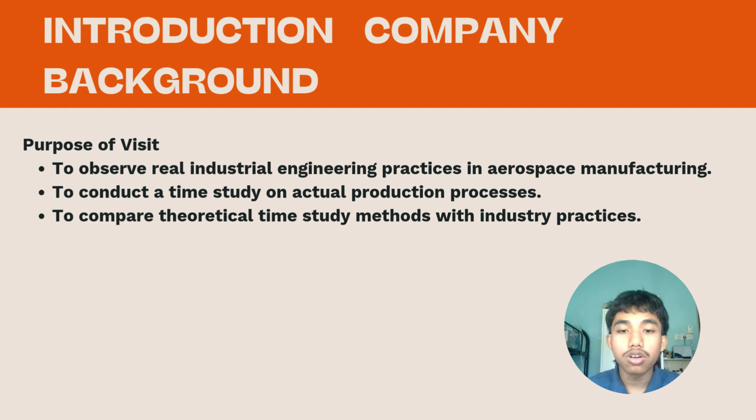Company background of the Spirit AeroSystems. So, what does Spirit AeroSystems do? Spirit AeroSystems is a global aerospace manufacturer of aerostructures. They produce fuselage sections, wing components, and structural aircraft parts for the major aircraft manufacturers in the world, such as Boeing and Airbus. But not just that, they also support commercial and defense aviation programs. Everything they do is about high precision manufacturing to make sure every part is perfect.

Problem statement. In our study, we identified a key challenge in time study methodology. The formula we learned in class is different from the one applied in industry. The theoretical formula calculates standard time by dividing normal time by 1 minus the allowance. Meanwhile, the industrial formula multiplies normal time by 1 plus the allowance.

This difference may seem small, but it has a big impact. It changes how productivity is measured, how resources are planned, and how realistic work standards are set. So, the problem we are addressing is the gap between classroom theory and actual industry practice, and understanding why this difference exists.

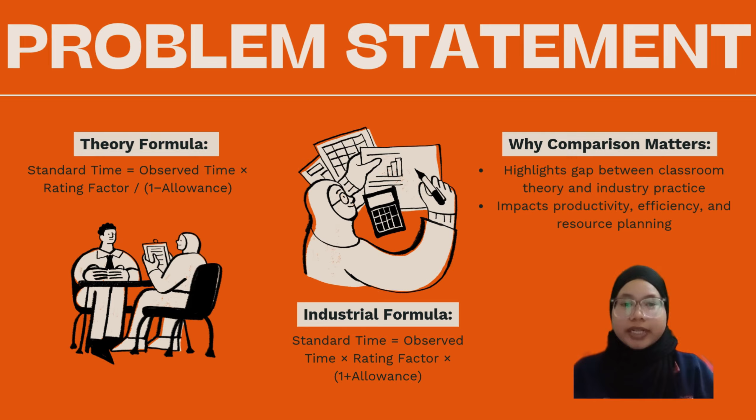To tackle this problem, our project has several objectives. First, we wanted to understand industry practice in time study by observing real aerospace manufacturing tasks. Second, we aim to collect and analyze real-time data, recording observed time over 5 cycles using stopwatch measurement. Third, we compare the theoretical and industrial formula to see how each affects standard time calculation. And finally, we apply industrial engineering tools to propose improvements in efficiency and ergonomics.

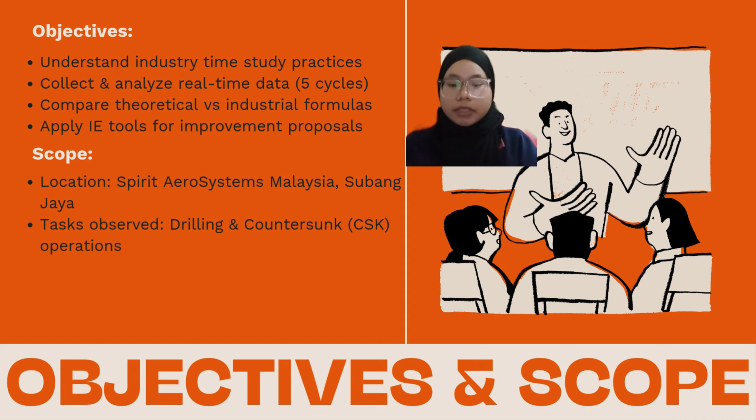In terms of scope, our study was based on an industrial visit to Spirit AeroSystems Malaysia, focusing specifically on two tasks, the drilling process and the countersunk process. So, I will continue for the next two parts, which are methodology and process flow. So, for the introduction of methodology, the visit was carried out at Spirit AeroSystems Malaysia, and we were assigned to the radome manufacturing area. This is to perform a time study and analysis for the manufacturing process.

So, our team has been assigned to collect data for two different tasks, which are the drilling task and the countersunk CSK task. So how do we carry out the time study and analysis? First of all, we observe the procedure step by step for each task. Next, the data are recorded over 5 cycles to calculate and observe any differences. We use the observation sheet from Spirit and the stopwatch to record the time study. The observation sheet was prepared by Spirit. Then we continue to record the time for each task in minutes and seconds for each activity.

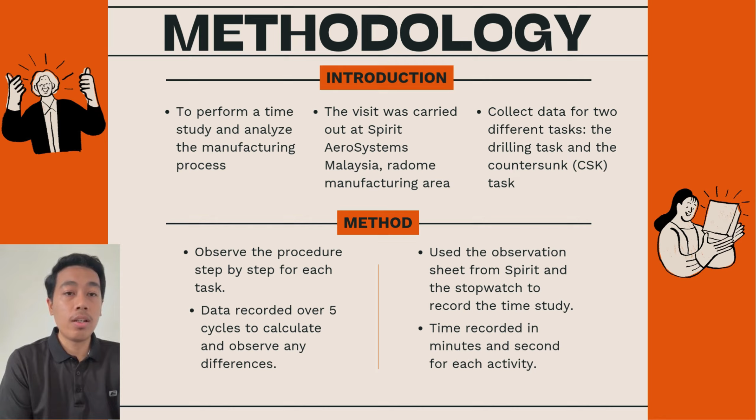The next part is process flow. So for the drilling task, there are many procedures to follow to complete the task, which is firstly connecting the air hose to the compressor. Next, attaching the air hose to the drill gun. After that, the worker needs to install the drill bit, stopper and the drill guide. After that, he will perform the drilling operation on the test piece.

After that, he needs to change the drill bit to the deburring set. Then performing the deburring process. Lastly, inspecting the hole using a go or no-go gauge. That's for the drilling task.

So for the countersunk task, CSK task, the procedure is much less, but it is still time-consuming because there are some adjustments or settings that need to be performed. First of all, attaching the air hose to the drill gun, same as the drilling task. Next, installing the countersunk tool. Then performing the required setting and adjustment. After that, carry out the countersinking operation. Lastly, conducting the fastener test.

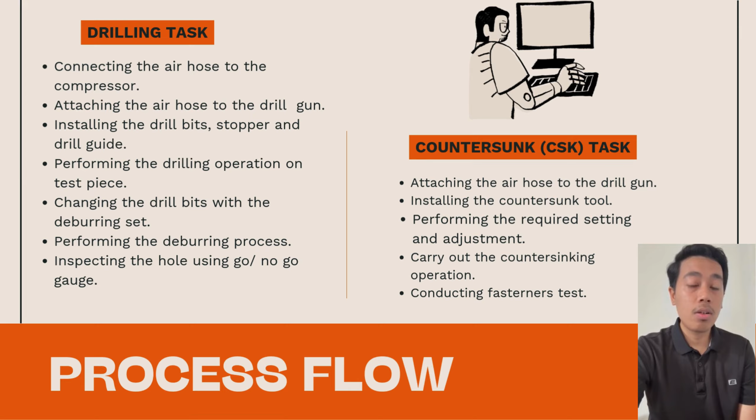Next, we will move to the result and analysis. Firstly, we conducted a stopwatch time study for 2 processes, where each process was observed over 5 cycles. Each task was broken down into smaller elements so that we could analyze the time contribution more accurately. For process 1, the total cycle time ranged from 84.7 seconds to 122.1 seconds, with an average cycle time of 107.54 seconds. From the element level analysis, element 3 was identified as the most time-consuming element, contributing about 44% of the total cycle time. This element also showed the highest variation across cycles.

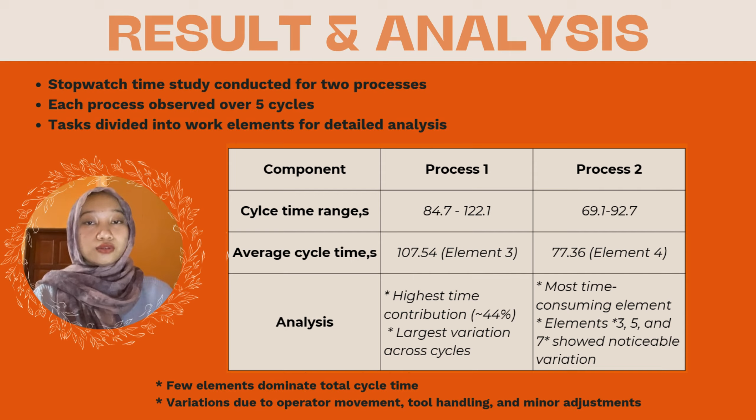For process 2, the cycle time ranged from 69.1 seconds to 92.7 seconds with an average cycle time of 77.36 seconds, where element 4 recorded the highest average time, while elements 3, 5 and 7 show noticeable variation. Overall, we observe that only a few elements dominate the total cycle time. The variations seem normal in real industry environments and are mainly caused by operator movement, tool handling, and minor adjustments during the test.

Okay, now for standard time comparison. First, a performance rating of 1.1 was applied to adjust the observed time to normal time. This assumes the operator was working slightly faster than the standard pace. Next, a 15% allowance was added to account for personal needs, fatigue, and unavoidable delays. We then compared two methods of standard time calculation using the theoretical formula. The standard time obtained was 139.16 seconds for process 1 and 91.01 seconds for process 2.

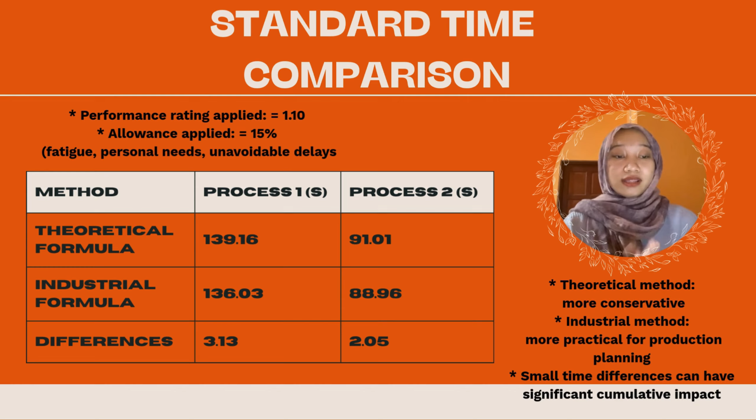Using the industrial formula by Spirit AeroSystems, the standard time was slightly lower at 136.03 seconds for process 1 and 88.96 seconds for process 2. Although the differences are small, around 3 seconds for process 1 and 2 seconds for process 2, this difference can become significant when applied over multiple cycles, operators, or shifts. In conclusion, the theoretical method is more conservative, while the industrial method is more practical for real-time production planning.

Based on our observation, we identify several improvements that could reduce the overall cycle time. First, for the drilling tasks, many setup activities were repeated multiple times. These steps can be standardized and completed once at the start of the shift to save time. Second, instead of changing drill bits for deburring, workers can use two separate drill guns, one for drilling and one for deburring. This eliminates unnecessary tool change time.

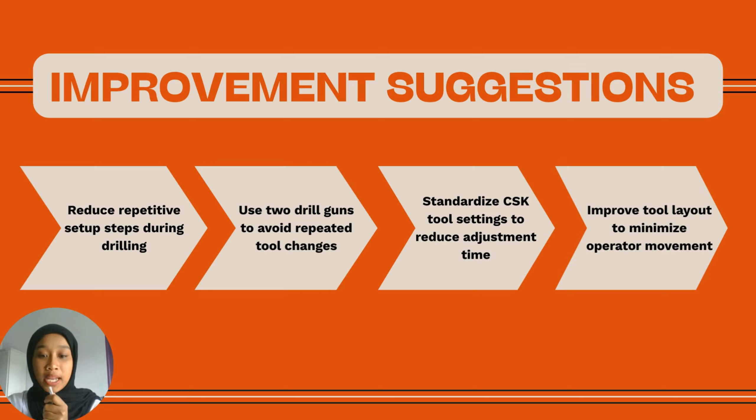Next, for the countersunk task, the adjustment of the CSK tool took a significant amount of time. By standardizing the setting for similar materials or tasks, this time can be reduced. Finally, improving the layout and placing tools closer to the operator can minimize movement and help make the workflow more efficient.

In conclusion, this industrial visit allows us to understand how time study is applied in real aerospace manufacturing. We observe that cycle times vary due to operator movement, tool handling, and setup repetition. From our analysis, element 3 in the drilling task and element 4 in the countersunk task contribute the most to total cycle time. We also compared the theoretical and industrial formulas for standard time. The industrial formula produces slightly lower values, which is more suitable for practical production planning. Overall, our proposed improvements can reduce unnecessary delays, improve workflow consistency, and support higher productivity in the manufacturing process.